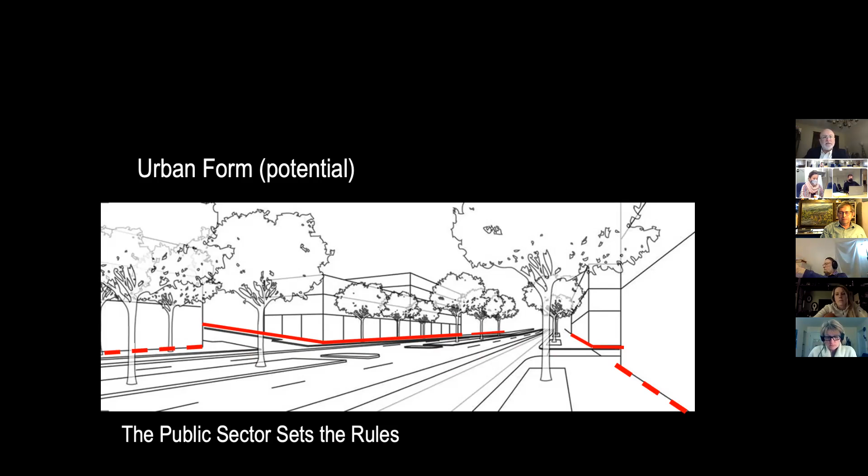We talked earlier about the idea that in a form-based code, the public sector sets up the rules, and the form-based part defines the street space. With the public realm standards, we're dealing with what happens between the buildings, making sure the sidewalk, tree lawns, travel lanes, and trees are done right. That's not a coding issue, that's a specifying issue, so that in partnership with the private sector, something great gets built. You can get developers to pay for those things, but they're really a very specific public design.

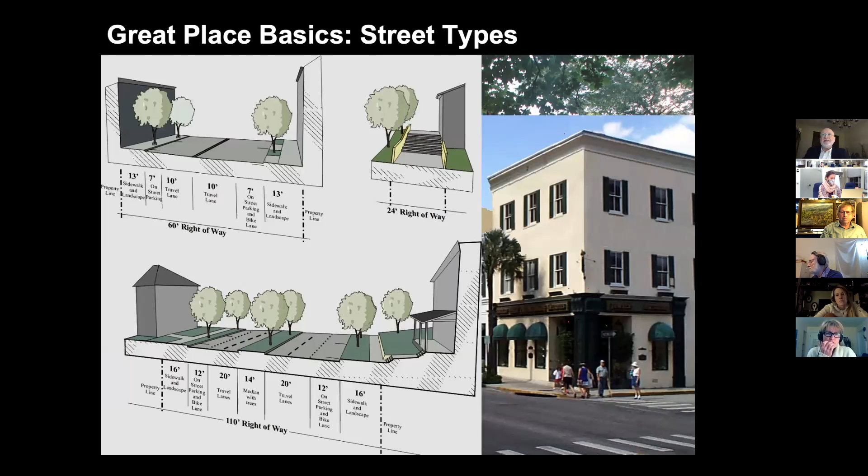Talking about streets, it's not just the place where the cars are, it's the whole thing. There are different types, it's not a one size fits all, it's a bunch of different pieces that fit together, a network. Some examples: in Berlin, Unter den Linden is a great boulevard, most like 2A. On the left, this is a mews street in Philadelphia.

We don't have anything like that here unless somebody private builds it within one of the blocks, which they're invited to do. We don't have a section for it, but we have rules for pedestrian passages, ensuring these will generally be things like this—from the sidewalk back through to a parking area or the back of the building. The rules make sure those are straight and visible, no hiding places. It's a short connection. I'll plant a seed in everybody's head a few more times about fall color and tree species.

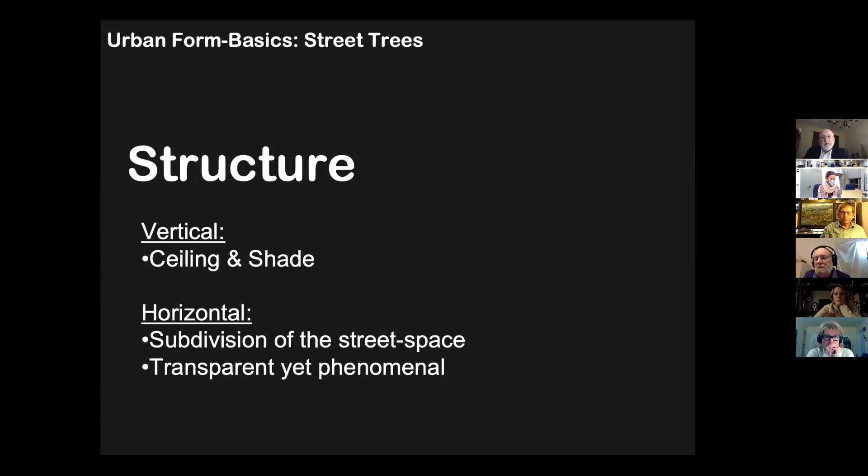When we talk about trees, everyone understands the biological value, their habitat, they're literally and figuratively green. But there's also a point about them as architectural, structural elements.

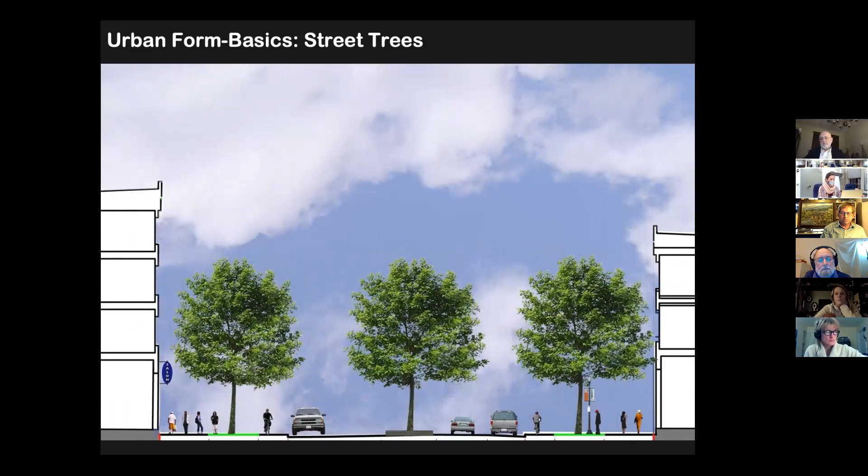This is a street, not one of ours, but a particular street 100 feet wide with a median—that's actually a pretty wide street. It's 4 lanes, and that median could be a left turn lane. With trees, you take that big space—one level has one reading of the big 100-foot wide space, but the trees start to subdivide it. When you look directly across the street, the trees don't block your view unless you're standing right in front of one, so you see the whole space. But as you look down the street, that 100-foot street is subdivided into smaller sections that really make it feel better.

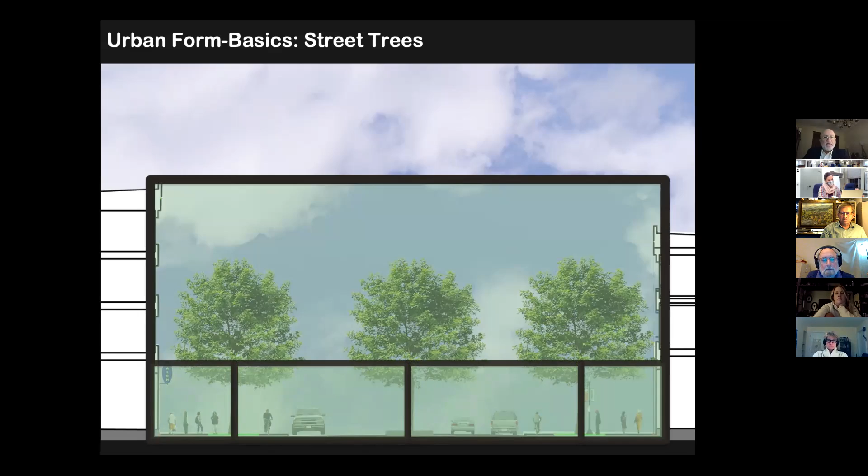Technique—I'm going to flip through things that we have avoided big time. The street sections we're going to show you are very good for the trees, which means the trees will grow and thrive, and this will be a very green place, especially in fall.

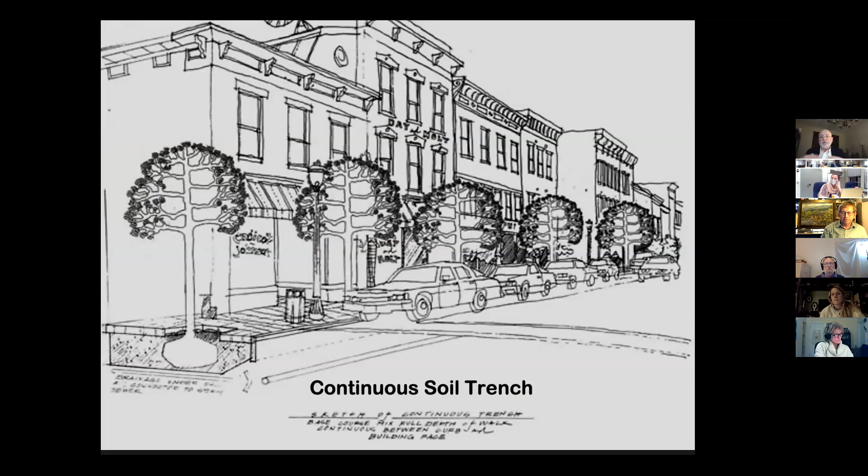The sections we're providing call for a continuous soil trench. There are a lot of different ways to do this, but basically the trees are going to see a lot of connected soil, which they can use more efficiently than a single tree alone—they can actually share soil in some ways we don't fully understand. This is an image that is actually in the code, suggestive of that.

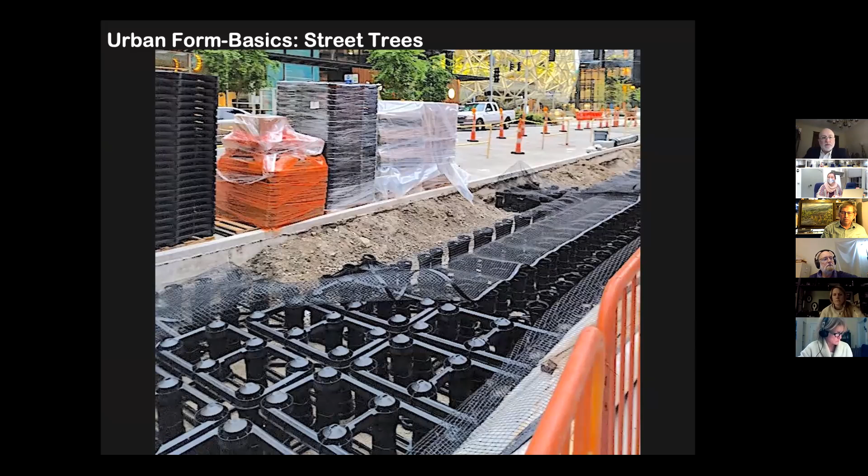So you're going to have great street trees, and that's hugely important. It means we'll all come back 5 years after they're planted and be impressed. And in 10 years we'll be wowed.

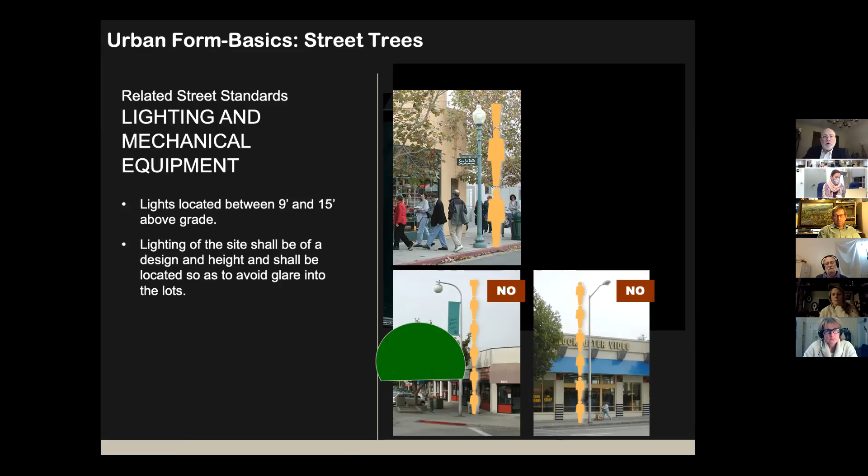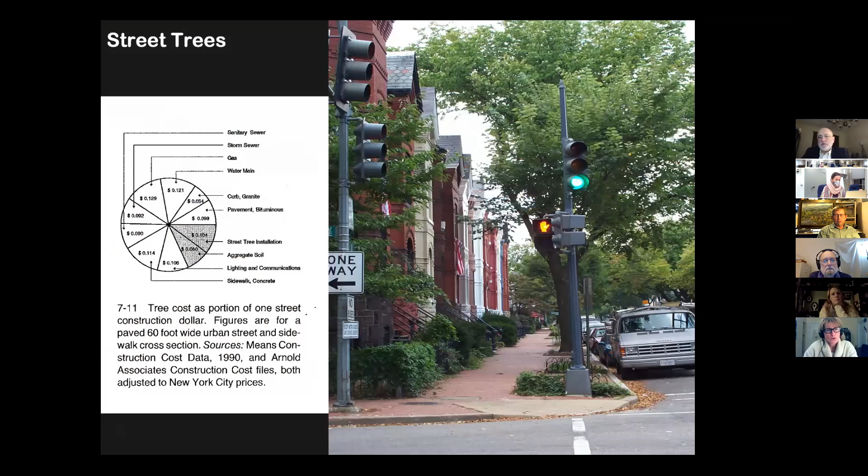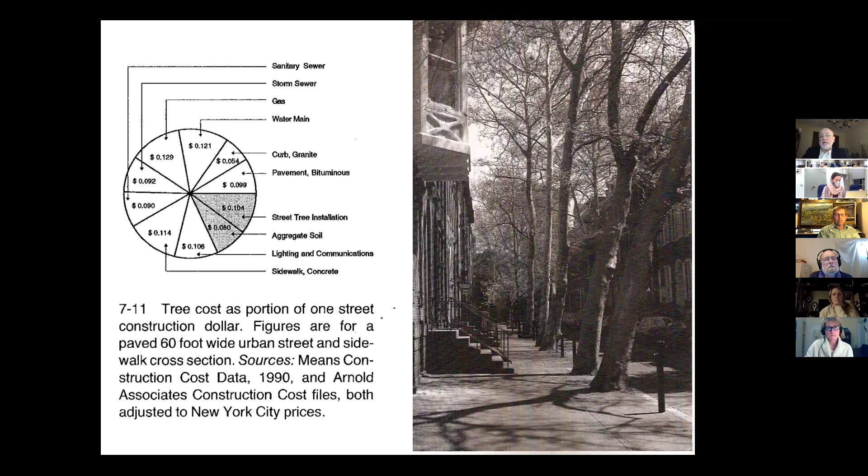A point about street trees and money - a percentage of the budget. Don't try and read the dollar figures, they're old. More look at the piece of the pie that the street tree infrastructure is in this installation. These were New York City projects by the architect Henry Arnold, who's no longer alive, but was one of the great landscape architects for urban trees. It's a small piece of the pie when you think about how trees that are properly planted start to grow and take over. Well worth the investment - it's something that just grows, increases in value over time.

Guess what kind of trees these are? These are American elms. Talking about the big bugaboo, Dutch elm disease - this is the before picture. This was a monoculture throughout, not just whatever city this was, I've forgotten, some Midwestern city. There was like a monoculture over states and states of cities. That's dumb, and this is the after picture. When you have a monoculture, you get some kind of invasive that just has a heck of a time and feasts on them.

I think the reaction of too many people - I think it's time for us to have our second generation thinking about this. The initial reaction is like when, at some point in everybody's life as a kid, they burned their hand on the stove. Well, that doesn't mean you never go in the kitchen again. I don't think anybody did that, but you're smarter about how you approach and use the stove.

We are now smarter about trees. We have resistant species, we understand the factors. I'm a big critic of regulations that say every other street tree needs to be of a different species. I will assert strongly that makes as much sense as never going near the stove again because you burned your finger once. We need to do this more smartly and manage it, and realize that it's not 1950 - we know more things than we did. Doesn't mean to be stupid, but a word about the incredible synergy that comes from planting the same or similar species.

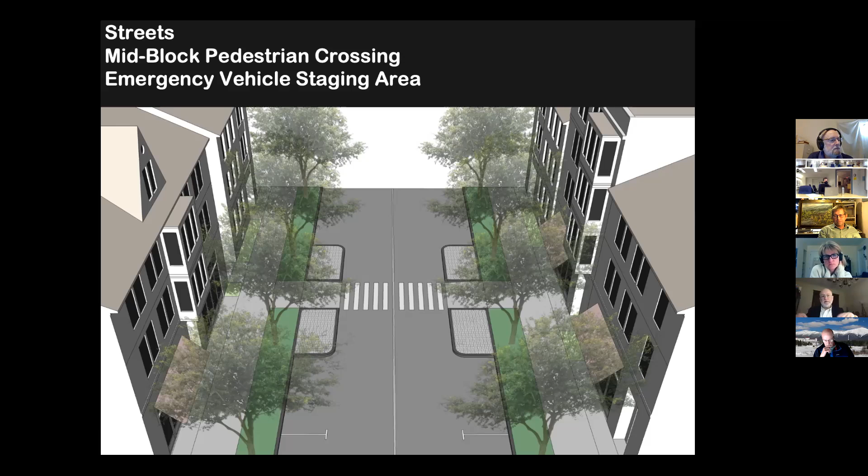Also, a car going down this street will see, even if nobody's parked, there's the curb stepping out to help really make the driver think and feel the speed.

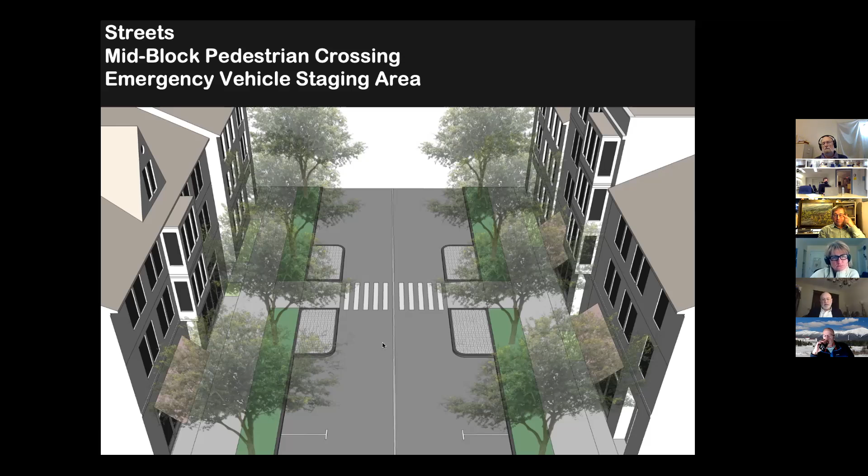If you're Aaron, if you're the fire chief, this is a place that's reserved where there aren't trees, where you can park your gigantic ladder truck, prop out your outriggers without fear of having to set them down on top of Chapin's Volkswagen or Maserati, whichever he has out that day, and then run the ladder truck in all directions. Also, fire hoses—there's a general rule that they can run them 150 feet from a hydrant, so this would be a convenient place for the town to plan infrastructure and place things like hydrants here. So this does double duty.

And then finally, the always underestimated but very important alley. Simply put, it's about 18 feet of pavement, plus 3 feet on either side, so it's a 24-foot right of way. The building form standards all have some kind of a setback from that line. So this is something that should be in the back of, or going through, almost all the blocks.

There may be an exception where something's a bit different, but this is a basic alley form. It'll take all the loading and parking, off-street parking off of this. And here's what you don't have, and I apologize for that, the streets map.

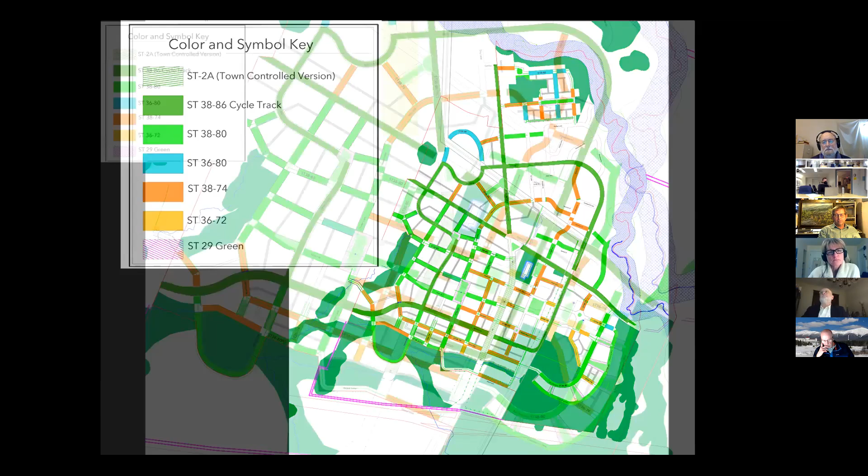Also some of Finney Crossing, the part that's built, so we're not really changing anything up there, but this is Zephyr. These darker green streets have the cycle track. It's not the only place there are bicycle tracks. If you look in the vision statement, there are also proposals for bicycle trails that would go along this edge and out through the landscape park here, also connecting up north. Those would plug into this. You see the framework, and in a perfect world this would be a more direct route, but it's not, so we have that funny loop, but it would all be connected. Where the green doesn't go all the way through, that's just acknowledging there's some engineering to be done where those intersections happen. But in general, that's the cycle track, the 86-foot section.

Now what happens on 2A, the cycle track configuration is the same, but that's a special section. The Williston Road up top, until you get out here where the right-of-way gets really wide, and I think that's a problem you might want to address down the road because it's just, I'd say, wasted width. But there's cycle tracks on that. Then the lime green, that's a step down, the 80-foot section.

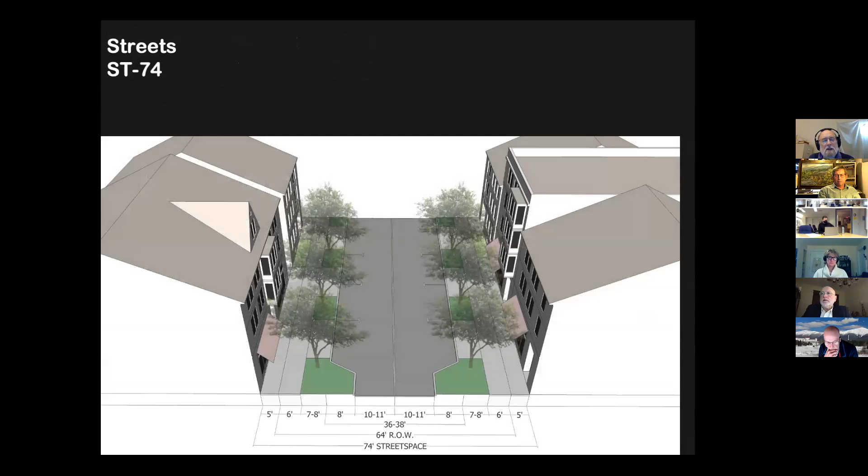What I was worried about is, as you pointed out, when people are parallel parking they swing their front end out. And if people don't park perfectly, 8 feet is pretty narrow to get your vehicle into. Well, although I would point out—oh sorry, that might have been it there. Well, they're all—let me go, I'll go to the green. Yeah, I went right by it. I parallel park, I don't drive every day, but there. I can't control myself. I don't drive every day, but when I do drive, I parallel park a couple of times.

No cars on the road are wider than 8 feet. To be wider than 8 feet, you have to get an oversized load permit. There's nothing you can do about somebody who just parks in the middle of the street except give them a big fat ticket.

In real life, when somebody's got an 8 foot wide vehicle, a pickup truck, and they don't get it all the way over when they try to parallel park because they don't have enough space, how does this actually play out, and is 13 feet comfortable? Even with a 10-foot lane and an 8 foot wide car, you'd definitely slow down to go around them because you're being careful. But in a 13-foot lane, you've got that room.

If somebody slows down to go around them, that could be an issue on 2A, but on these streets, not so much. Someone might think differently, but no one's going to get run over by a car that's slowing down. The 13 feet is wide enough for the fire vehicles to get through.

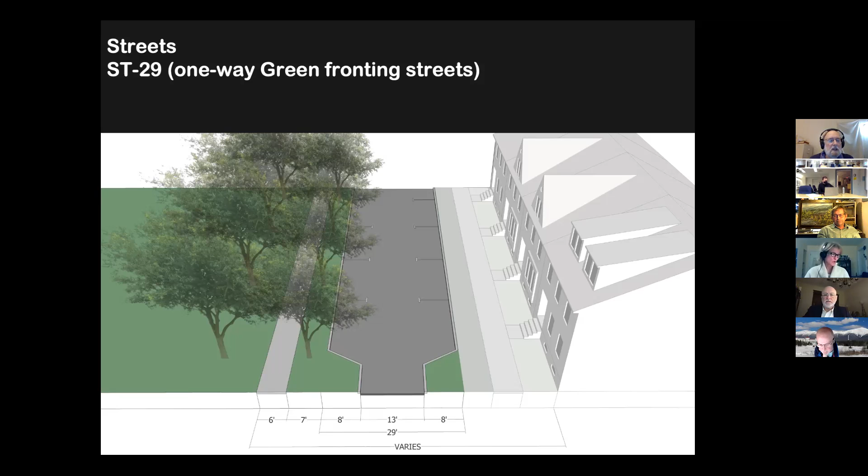I'm not that used to speaking with Rick on this, so I'm saying things I should be quiet about and let him do the talking. He says it in a lot fewer words.

Jeff, speaking of which, do we have an ST 3672? I don't think we do. We kept the rights of way the same. The street, that's why I noticed it. By having standard rights of way, you can make changes later if you need to, after the plan has been prepared. So we actually just have 74 and 80s, I think, and then except for 2A, right?

Yes. And then some figuring out what to do with the, I would say, egregiously wide piece of Williston Road that is on past Zephyr Road. And I apologize, this is my mistake, just a mistake, it should be 74. We have two 74s, two 80s, the 86. Right, it's right in the plan, it's just not right in the key.

There's some thought to what streets might carry more traffic, what would be busy. Some of the concentration of 74 in this area is thinking it's more likely to have retail because of the current retail here. And then mixed into that, it's kind of a goulash stew with ingredients. There's some value in a little bit of variation too.

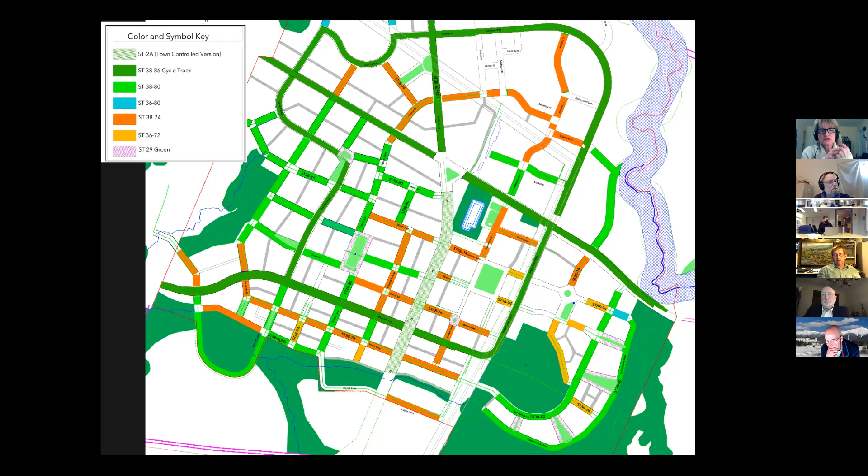So in the cases where you showed a diagram where there was a cycle track that was separated from the road and also separated from the sidewalk, like on 86, it has the green, these framework streets—street, travel lane, parking, then cycle track. So my question is, are all of the darker green places where the cycle track is buffered by on-street parking? Except, other than never say always or never—so there might be an exception, but the rule is yes.

Okay, so those are parking spaces right off the travel lane. So I guess maybe something we can pay attention to, and maybe Rick has some additional comments on this, but I think having as much consistency as possible for the cycle track streets where there is on-street parking would be a benefit, for that element of predictability where you know what to expect.

Yes. And I was just curious if that was the case—not 2A, because there's no on-street parking—but all the other areas that are cycle tracks, are they always buffered by on-street parking? It's designed by design. Yes.

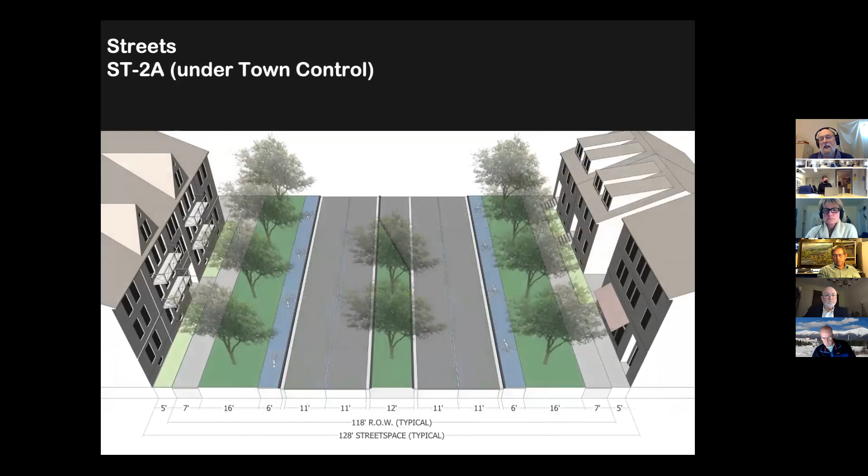I'll just comment that this is a lot to absorb all at once because it's updates and new information. And I think we're still lacking a drawing that shows what we were just talking about with a cycle track that's separated from parking.

That should be on page 75, right above 2A. Well, it's next to the parking. And I thought we were talking about it being separated from the parking, from the on-street parking. No. Oh, so I misunderstood Megan's question and your answer. So in areas where there's on-street parking, the cycle track would still be next to the cars?

Yes. That's a good thing. Because, okay, except for doors opening. But we don't have a 3-foot cycle track, we have a 6-foot cycle track. Yeah, that's plenty, and it's one way each way. Okay, I think that's fine.

As a frequent cyclist myself, I think that's a really good configuration. I'm really happy that that was your answer to my question. And a small point, this is ridiculously esoteric, but the first time I started dealing with that section, Rick was in on this as well, but Steve Price, who does the photo imaging that's so excellent, he is a bicycle advocate almost to the extreme. This was something he was pushing for in a project we did 15 years ago and showed us images of it, and we grabbed it.

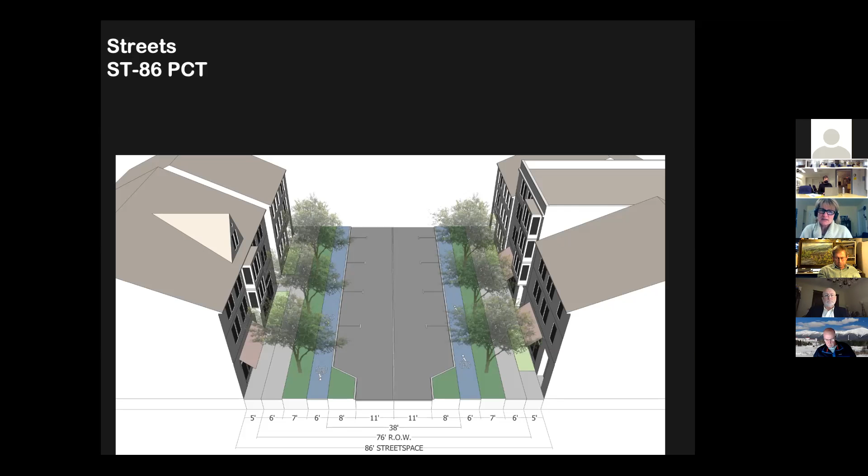I guess I'm a little confused on what our process is here tonight. I know we jumped ahead to the public realm because Rick was with us. But I had a lot of comments on the public realm section, and I wasn't clear on whether you were looking for that feedback tonight, or was what you presented, Jeff, kind of like a quick overview and now we're going to go through it in more detail? Because I'm a little confused. We can certainly go through it. And there are a lot of changes which I missed, I read the old one and can read on the spot, but a lot of my questions or comments are still relevant. I was just kind of curious about our priorities given our time.

I would say we can absolutely go straight to talking about this, I feel like we've covered the street sections enough. There may be questions, details and comments about it, but I think the discussion about the different sections was starting to lighten up a little bit. And I do feel very strongly, these are real street sections, courtesy in large part to Mr. Chellman. So we can certainly answer more questions about them, and why not move on to things like street furniture and noxious weeds.

In which case you don't need me, right? You don't like noxious weeds? No, I guess we don't.

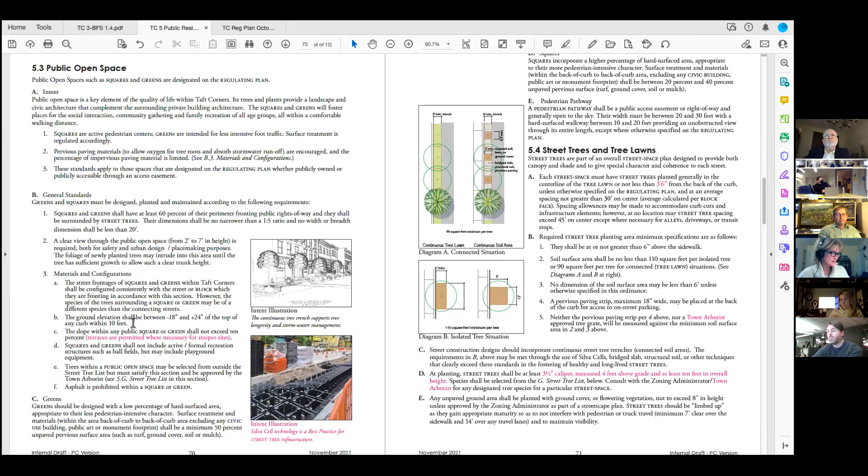Fair enough, but there are some efforts to have more natural landscapes that use different species and are planned that way, so it's not weeds, but unmowed sections. I'd like to acknowledge that's possible, that maybe the exception after the 12-inch height could say something like 'except planned and maintained natural landscaping' or along those lines.

I'm not against that. I'm concerned though, because it does happen, and it's not going to happen early in a first building's planting, but there's always a concern about somebody who plants bamboo in their front yard. Actually, my mother was fined about 16 times by the city of Denver over buffalo grass. So we'll expand on that, I think. Okay.

I think, like the others, I had a couple other small comments, but they're preempted by your new pink materials, so why don't we just move to that. Okay.

What happened with this pink is an earlier suggestion, let's have some consistency. I think that's really important with the street lights especially, and secondarily with the benches and bins. So that sort of pricked the balloon and let all this out.

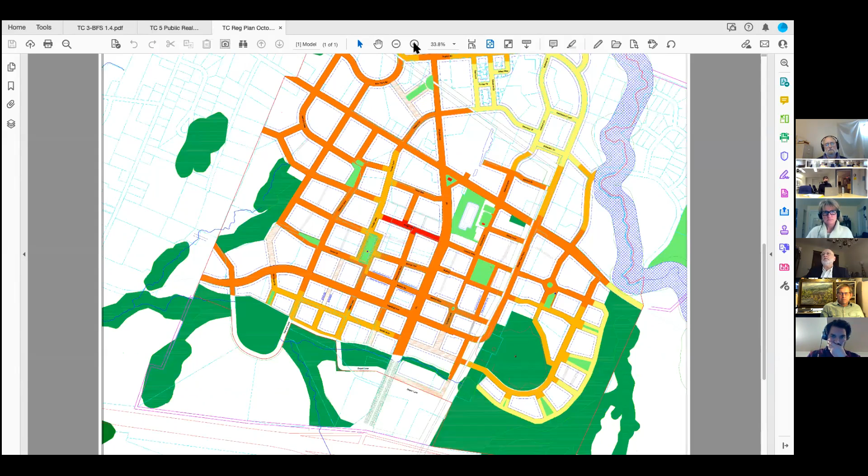Looking at the regulating plan, I think I'm freezing up a little. Look at how much natural area there is, and over here I don't show the green, but this is all natural - in really close adjacency we have real natural area. But there are a few places with simple lawn, because that's where you can play catch, you don't need to join a team or anything. You can sit and eat lunch. They're incredibly flexible spaces, just to be used to do whatever.

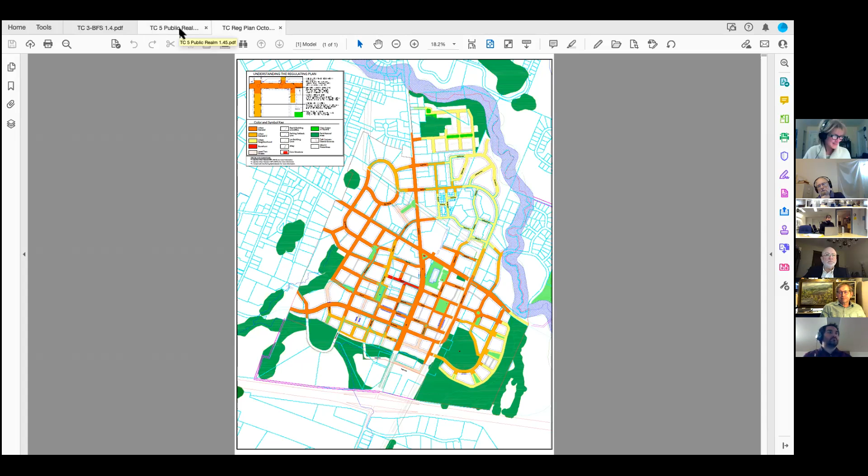Megan: I have a lot of comments tonight. In the general standards under public open space, number 1, it says squares and greens shall be surrounded by street trees. Can we have a caveat about that, to not put trees around spots where there might be a really great mountain view? Because I think that's one of our nicest opportunities in Taft Corners, to take advantage of those long views of either the Green Mountains or the Adirondacks, depending on where you're standing. But if we fill it all in with trees, we won't be able to see them anymore.

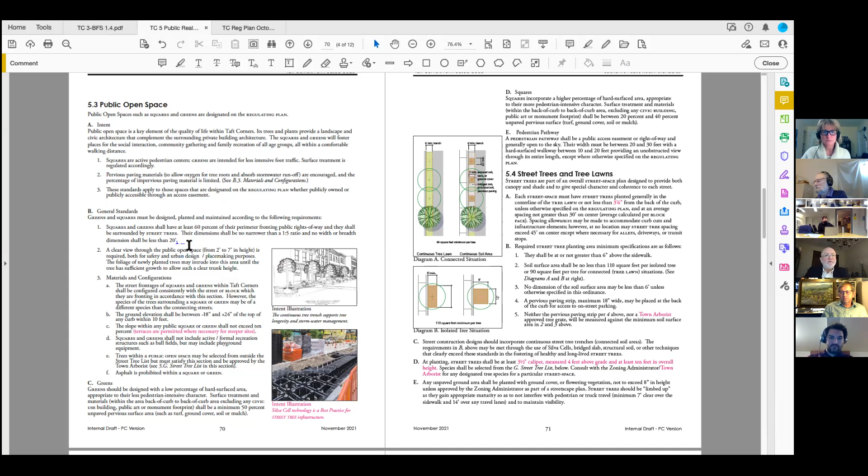Yeah, I wrote it down. I don't think it's a problem because you can vary the spacing and set up special views. But I don't know if it's on everyone's radar screen - like the contractor comes in and is supposed to plant trees around the edge at a certain spacing, and that might not even get any attention. I think when we talk about the regulating plan, there's some places, like right by the big pond where you've noted some topo differences, where we could actually mark the spot and designate it as a viewpoint. Okay, great, thank you, that's helpful.

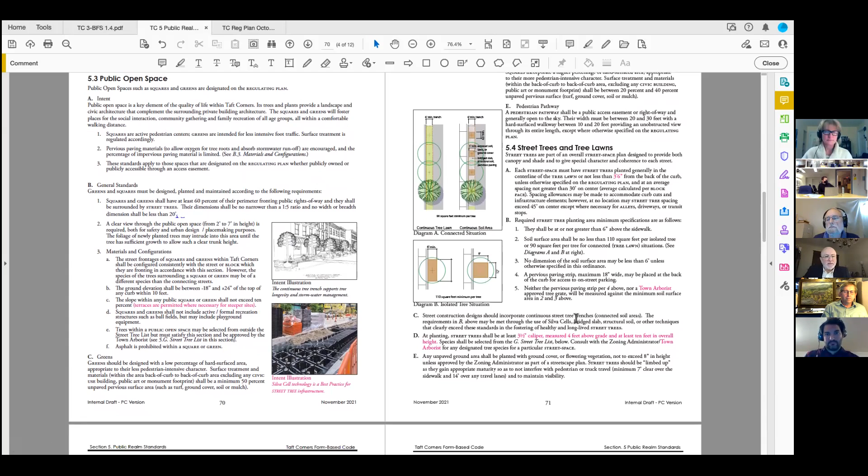The term town arborist is something you probably saw - right now you don't have one. That might be someone designated, and in 10 years you might have one.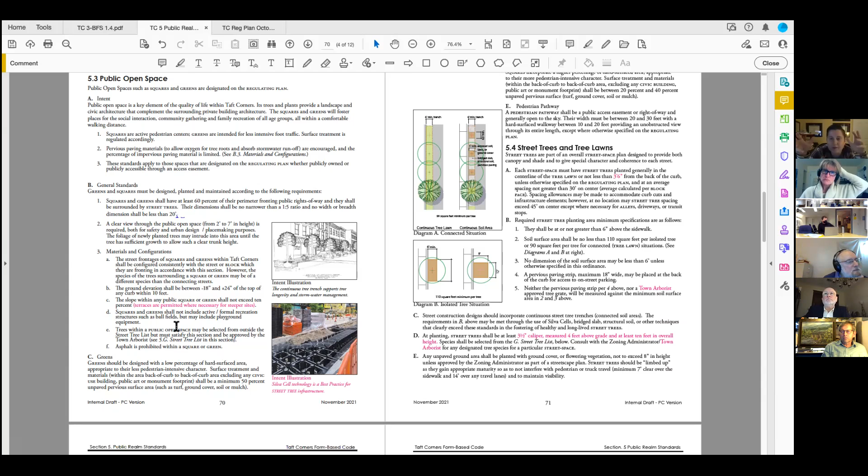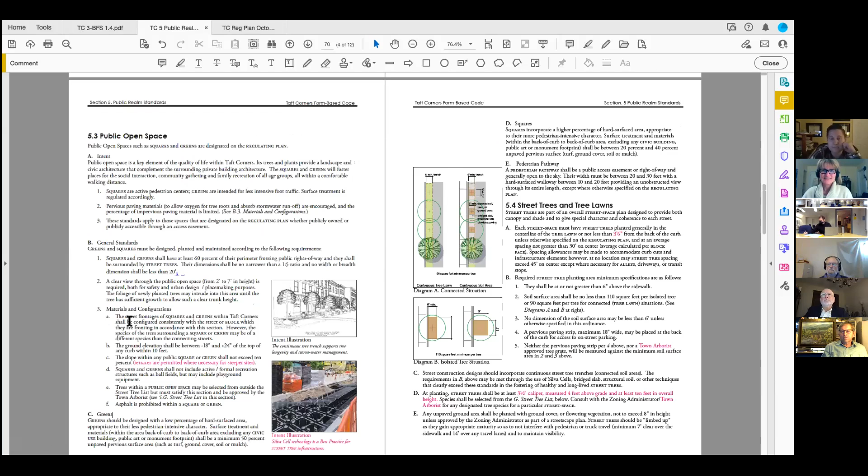Jill, would this be the spot in public open space, maybe in your general standards, where we would talk about some freestanding restrooms? Burlington Square has one near the little water park. I just think not having people purchase stuff to use a restroom, especially with COVID, being able to do it without going into buildings when you have kids and you're just using green spaces and need to go potty real quick - I've loved that Burlington added that. I think we could have multiple, given the size of our space.

Yes, and I should have already inserted something like that. It's a very civilized thing that they have in a lot of places - I don't think it's only in Europe, but I think of it as European. I recognize Burlington just added one, and that's huge. Jeff, the one in Burlington is one of those Portland loos, it's in City Hall Park. I'll send you the spec for that.

Okay, I'm wondering about benches, waste and recycling bins, bicycle racks. There's a number 7 or 8 here, something.

Yeah, and I'm sure it's happened to all of us. You get caught out.

Kate: Well, I'm just wondering, who's going to clean that? Because that's something that would need to be highly sanitized often. That's a good point.

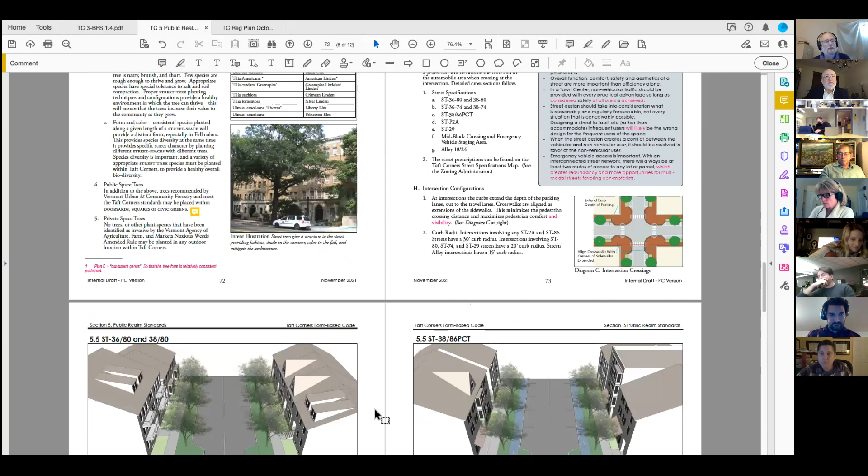Jeff, if I could give an inappropriate comment, I don't like the roofs in all your pictures of the different street cross sections, and I don't like the dormers. But I don't think that's the purpose of the drawings, you were trying to show you could have pitched roofs with dormers. Also, there aren't enough balconies, and some of the designs for non-storefront streets have an awning showing at the bottom as though it's for storefront. So those are trivial objections, just my personal preferences.

Well, that could be, okay. We'll work on that. What's your problem with the roofs? I'm curious, a tweak might be an easy thing. You want to see a flat spot with solar cells? I would like to see solar on some of the roofs, yes.

And if someone were to do what's shown here, they'd have to do a lot of work to prevent ice from falling on the sidewalk. So I'd like to show something a little more practical. We'd have a steep pitch, I thought that's less than the minimum pitch we've specified.

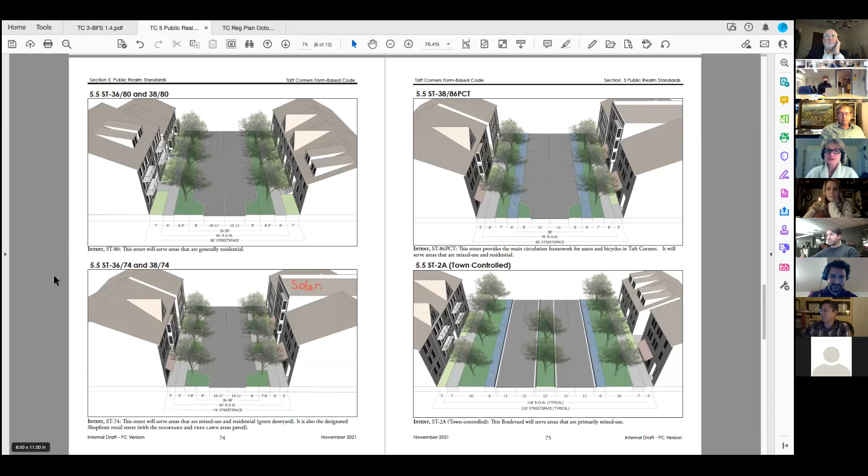So just to kind of regroup, what is your preference? Matt, I'm not sure, did you want us to try to talk about the building form standards, or was that something you were going to respond to? We've got about 10 minutes that we could address some pressing issues. Let me see if I can just summarize what I saw.

I saw survey responses from Jill, Megan, and Chapin, and I've copy-pasted those directly to Jeff, so he has your words. Matt, I also submitted survey results, but I did it a bit late, so if you wouldn't mind also forwarding those on. Absolutely, will do.

So, where we left off with building form, we had a lot of discussion on the general standards that apply everywhere in one way or another, but we hadn't had a lot of discussion on the standards for the specific frontage categories, the four categories mapped into the regulating plan. Absent one comment in support of one height standard, I didn't see a lot of feedback on height. There are some selections that could be made there, but we had a more general conversation with the group that was here last week, general interest in height as an element of design that allows for integrating affordability and achieving some of the other goals of the town plan. So I'm not demanding everybody give me fine-grained input on building height, I'm just saying I'm not seeing a lot of response in the survey related to heights as they play out in those form standards, because that's one of the ways those form areas differ from one another. You go from bigger to smaller, essentially.

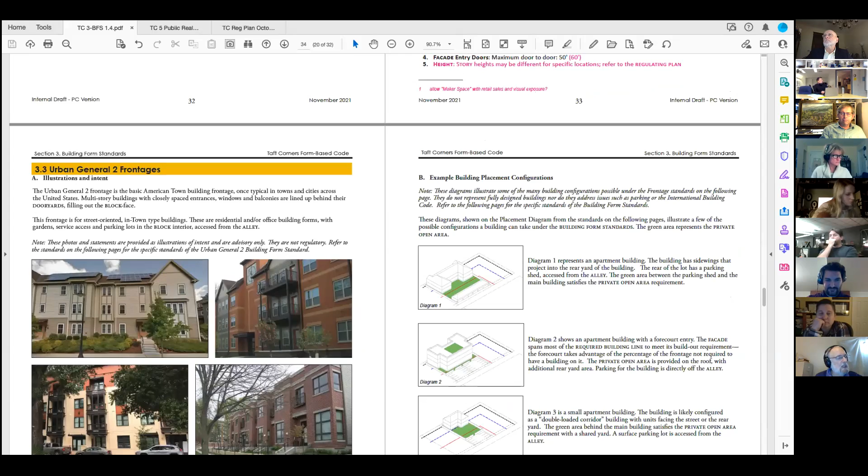A couple comments we got on names of the areas. Jill, I think you called out that we talked about using a less loaded term than neighborhood manners when discussing how new development integrates against the existing neighborhood. We talked about changing that to neighborhood relationships, and I think you saw some of those changes, but not all.

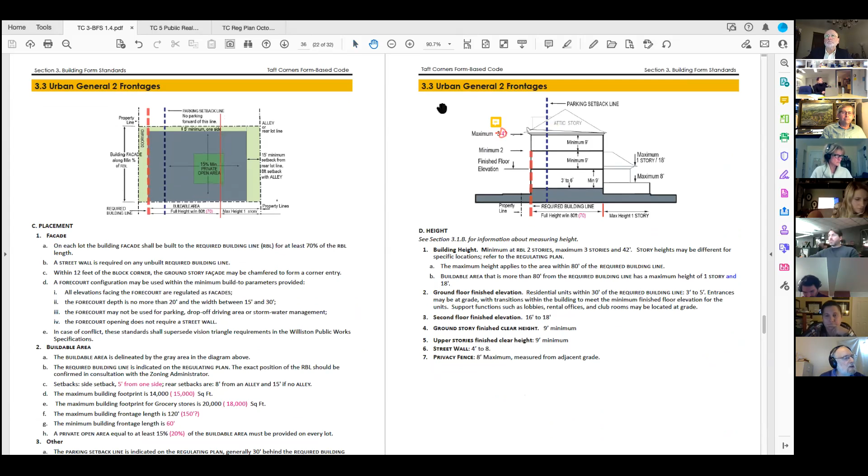I was also wondering about the idea you asked for feedback on in the survey regarding naming. I wasn't being clever when I was going through that, but I think maybe that's an opportunity for public input. I know other towns and cities have crowdsourced that kind of stuff. Granted, there's some goofiness that can happen, but it's a good way to get public input for renaming those zones so they could be Williston specific or Williston unique. The public might come up with good options.

We can just jump right to 'Urban McUrbyface' if you want and skip the public input. Yeah, sorry, that's a terrible joke, but it's a possibility of course.

But in terms of where we're trying to go with it, I'd love to bring it out to the school kids, just like we did with the snow plows. I mean, I think that's good, and it's the same thing as we've talked about regarding the uniquely Williston stuff.

Chapin had some comments about really pumping up the support for solar in regards to the way we talk about form. And I think it's a discussion we might have a little more offline about how we make sure there's good ADA access to buildings, because we have questions about floors and lobbies and entering at street level. If I'm reading all that right, we certainly don't want to tell somebody who's using wheels, whether it's a wheelchair, stroller, or anything else, that they always have to use the rear entrance. But there's a bunch of ways to go after that without being too heavy-handed on design.

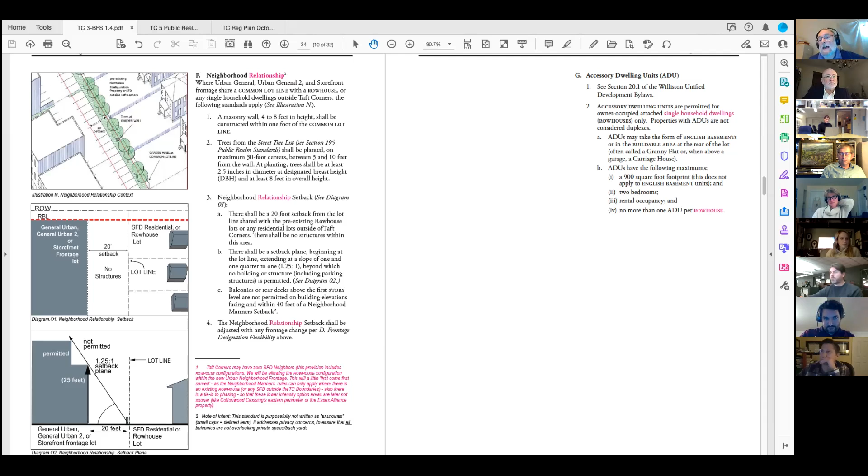On that point, I would just ask if staff could check with South Burlington on what they're going through with those apartment buildings in the new stuff off Kennedy Drive, and see why that's been an issue. That would totally answer my question.

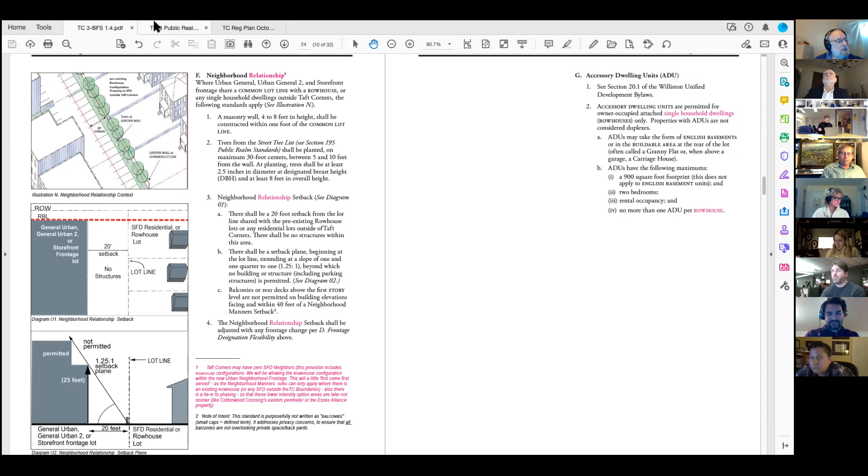There's something I didn't put in my comments that I wanted to ask about, on the revised one. It's on page 9, which is actually numbered page 23. I think this occurs in several places, where it says balconies, where balconies are required or being used as a method for achieving the required private open area. It didn't make sense to me that balconies can qualify as private open area, because I thought the idea of private open area was that it was for the building, not for individual units. Did I miss something there?

The big tenet is private open area is supposed to be private. For single family, it can be private to the family. For common buildings, it has to start to be some kind of community or building-wide thing. But balconies are the one exception where you can actually have an apartment that has its own private open space. So that's a luxury, but it's definitely still private open space. It's actually, in a way, more private.

So what I am worried about, going back to a comment I brought up last time, is if you have quite a few units in an apartment building and most of those people have dogs trying to walk them in the private area. If some of that calculation of the private area is for balconies, I really worry that we haven't specified enough space. I would say we absolutely have, because typically in zoning they'll have a maximum lot coverage, and anything not built on counts as open area. So 20% open area, a lot of that can be garbage space, little slots between buildings. This 20%, or whatever number we land on, is only part of the buildable area, and any side or rear setbacks are in addition, so it's typically a bigger number than that.

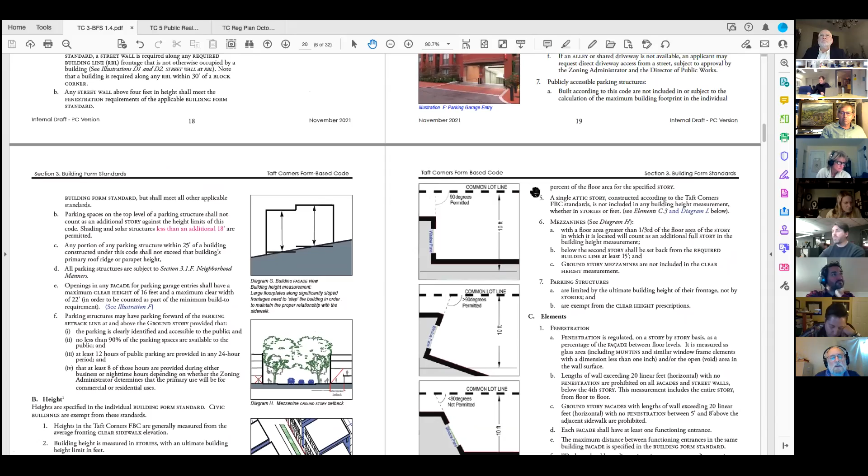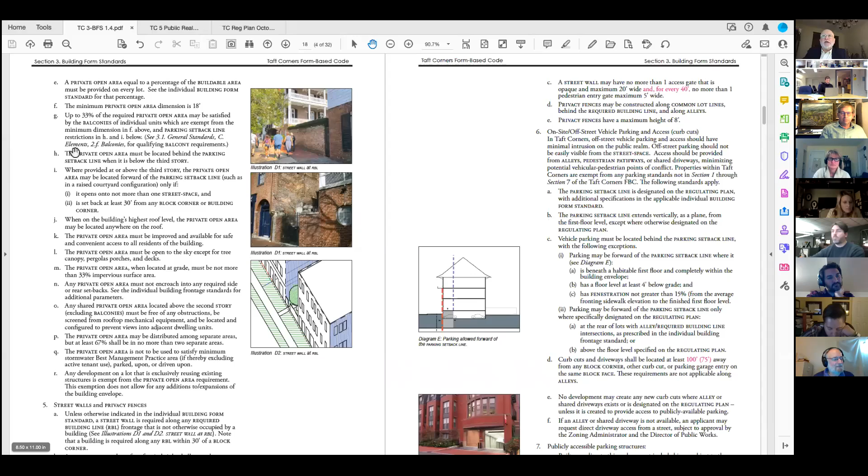You sort of convinced me of that, but if somebody had a lot of balconies, could that add up to their entire space? No, there's a limit on it. What did we say? I'm thinking 30%, but I'm not reading that right now. Let me look it up... Oh, page 18, up to 33%, so a third.

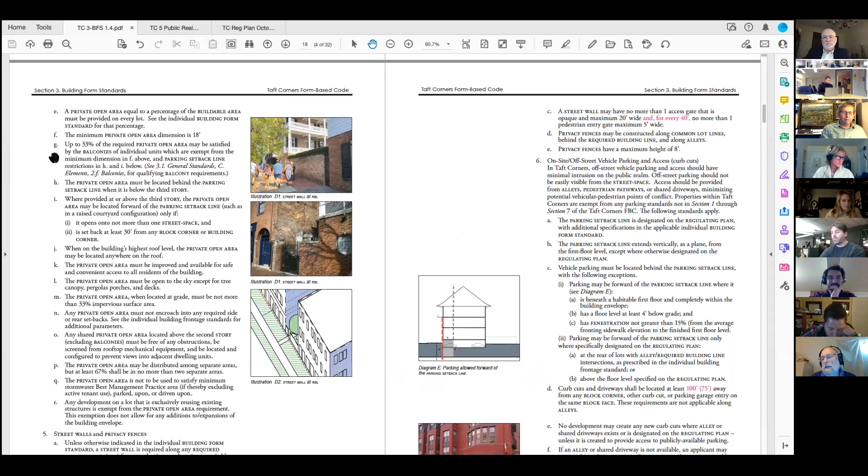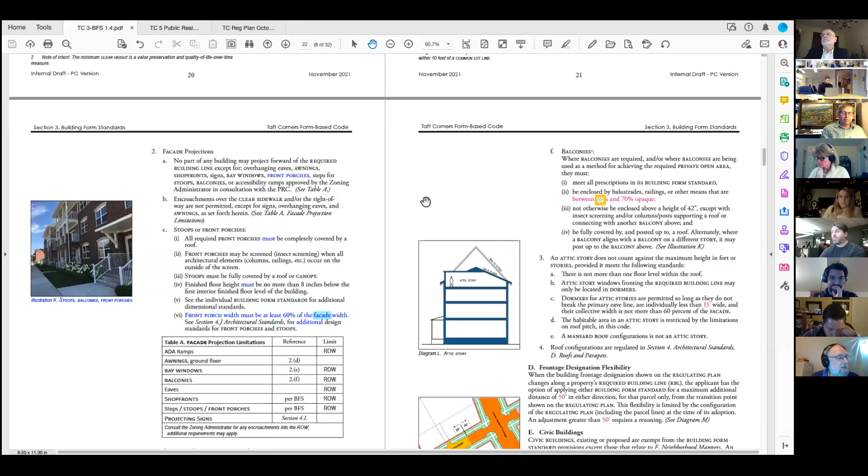I wanted to reiterate one comment about balustrades or railings on balconies. You were worried about what people had stored on their balcony and how visible that was from the street. I'm worried about a different aesthetic, and thinking I'd really like to be able to have wrought iron balconies as decorative railings. I think you have it there as 25 to 70%, which was a change from 50%. I saw that comment and want to change it to 20%. I'd say if it's a decorative wrought iron balcony and not just a minimal building-code balcony, you can achieve 20% because it's going to be more than just 4-inch bars. I just wanted to make sure we weren't excluding that, because I'd choose other ways to control what people store on their porches that's visible from the street than to say you couldn't look into it.

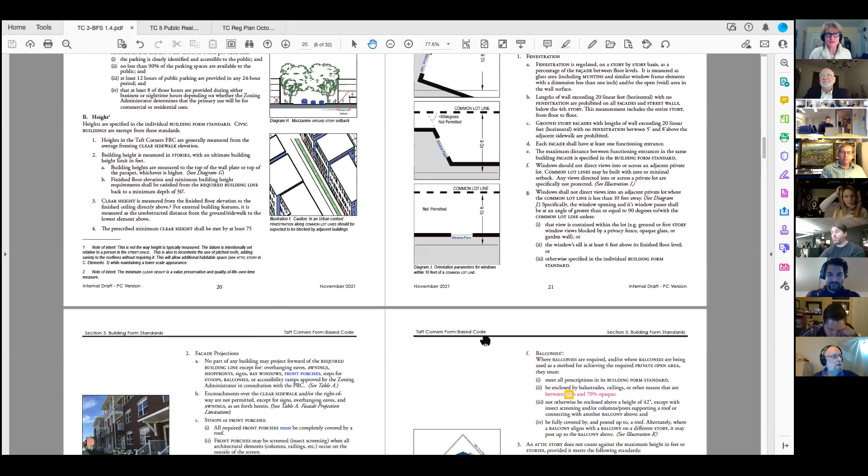Just a really quick comment — let me get the right section. In C elements, the section is C2C, stoops or front porches, on my page 22, which is the old page I think. So it says stoops must be fully covered by a roof or canopy, and I don't think that's right. I would suggest it is, even though you see a lot of stoops that aren't. It's better for the climate where you have weather, keeps stuff off the door, gives you a place to stand out of the weather. And talking about flat facades and having some shade, shadow, and relief, that roof projection adds that. But that suggests the entire stairway out front needs covering.

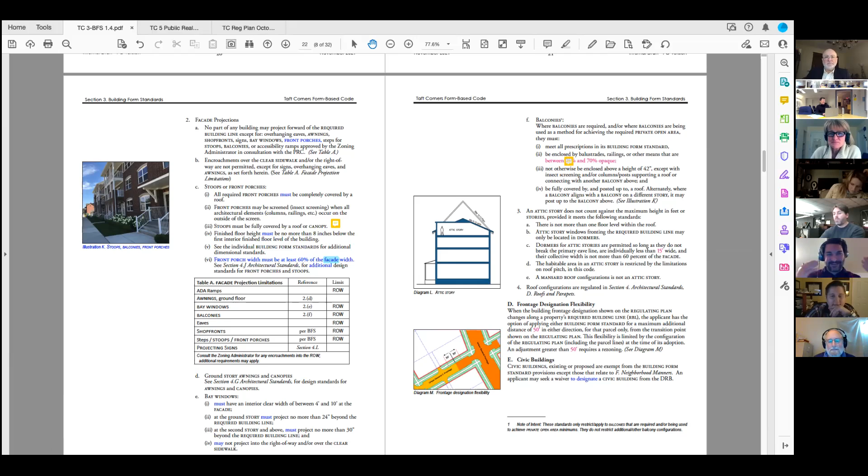Not the stairs, the stoop. Okay, can we just define that? Because if you Google image 'stoop,' you get stairs, right? Not just a little recessed door frame — you get stairs. And I think people, in whatever, Brooklyn stoop culture, that's sitting on the stairs, not the immediate door frame. I get your point, but I think there's a little bit of a lack of clarity there. I'll put that in the yes or 'right' category. Thank you, I don't need to keep track, but just a quick call out there. Taylor's rolling his eyes.

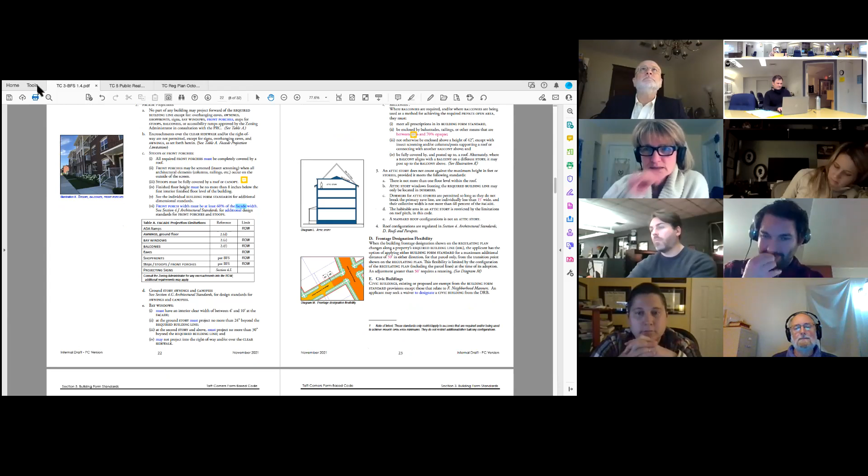My bad. All right, so minding the time, are we pretty much wrapped up with this? Are there other final comments that anybody wants to make on the building form standards?

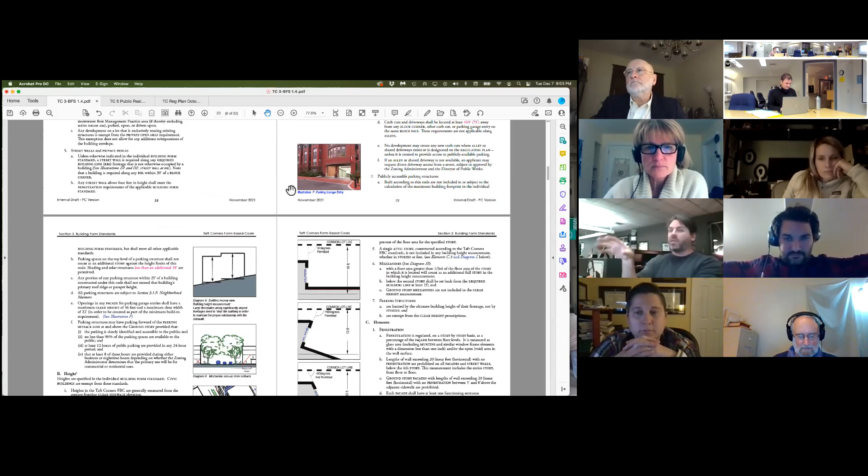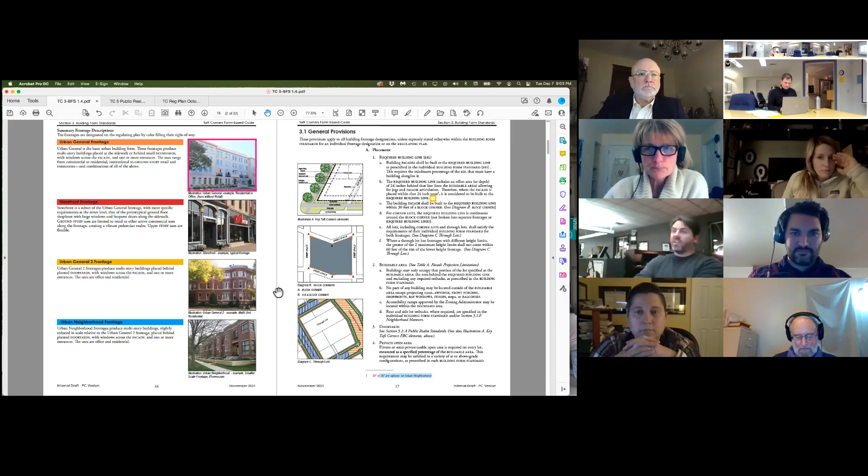Megan, can I just ask more generally — I really liked the survey. It gave me a chance to sit down and really think over these things. I sent a lot of feedback in writing that I didn't feel was necessary to go over as much here, because I think it'll make it to Jeff. Can we do the same with the section we just reviewed on the public areas too? I'll be honest, I didn't get a chance, trying to catch up to you guys, to go into that as much as I wanted. I think it'd be really useful to send out a similar survey. Yeah, I should keep my mouth shut because I'm not the one doing the work.

I think you could cut your work in half for the survey, because I wasn't the only one confused by being asked the same questions twice. It was like, what comments do you have on these pages? And then the next section asks what comments do you have on this section. It was a little confusing and more work than needs to be.

I also found it helpful to have that time on my own to go through it a bit. I appreciated all the changes made from last time, even though I listed some things again, it was nice to see the responsiveness. I agree with that. Capable of learning, that's great.

Other final comments? Matt, anything to send us off with? No, I hear you on the survey. We'll put something simple together geared toward you guys walking through the public realm and providing additional feedback, and we'll consolidate that back. We're scheduled to move on to other sections in the next couple of meetings, so we'll see everybody in two weeks.

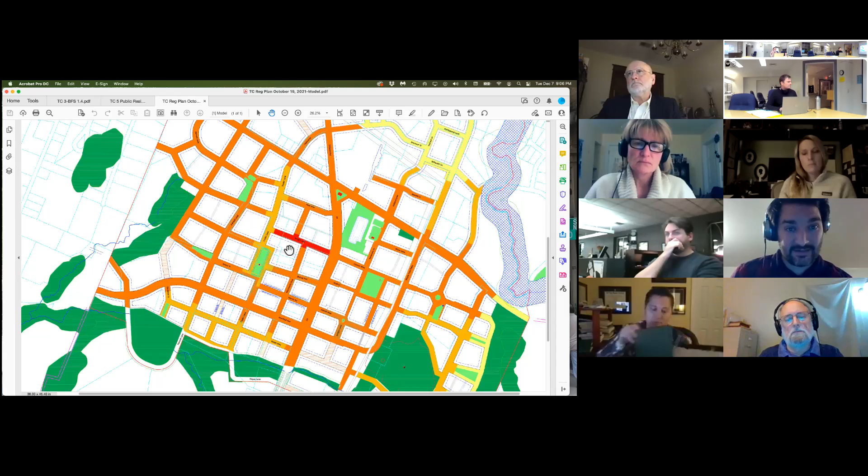I think we also wanted to take a look at that administrative section too, if possible, on the 21st. Yeah, we can do that fairly short. I don't think the PC has that section yet, that's section 8. We're drafting that now, we're going to discuss it Thursday and hope to get it finalized and out to you, fingers crossed, maybe Friday, maybe next Monday.

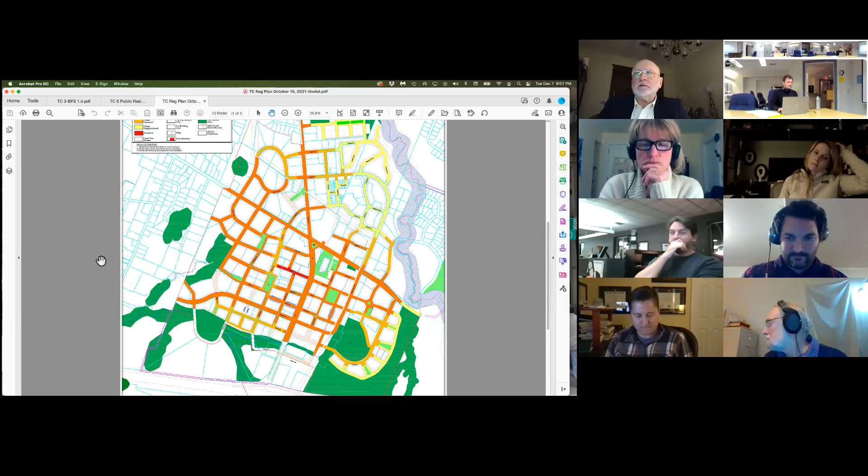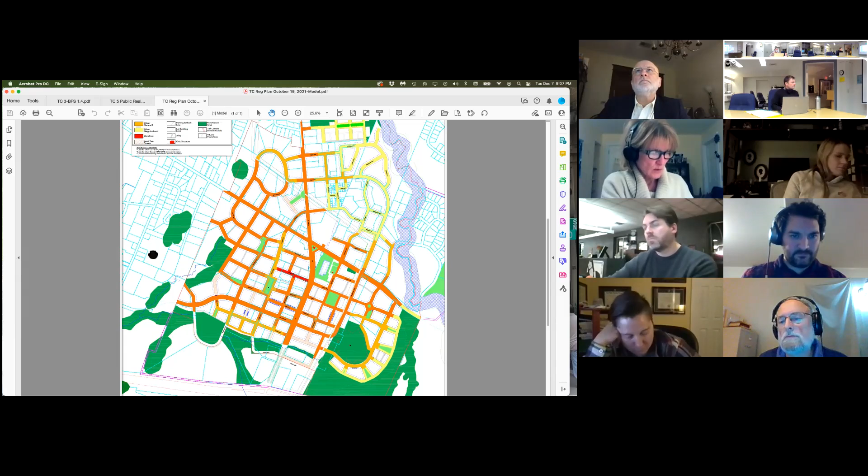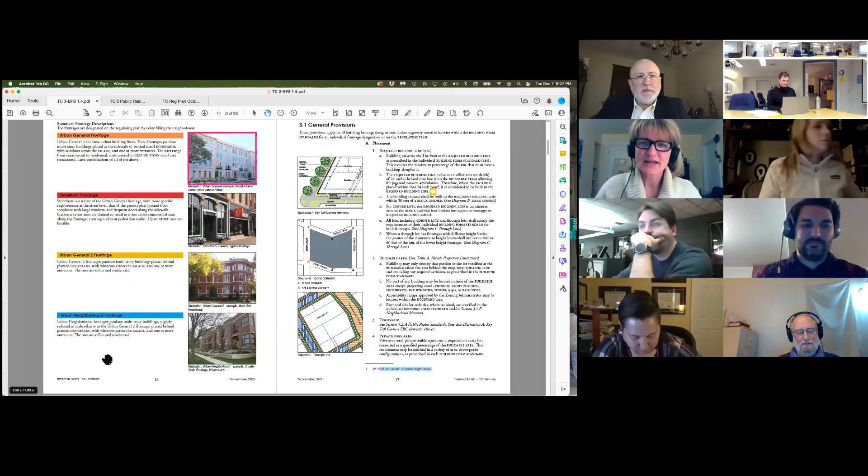Those colors should all match up. Right, I couldn't find blue on my map, which I have. This is definitely, sorry, this is my real Homer Simpson moment, that should be yellow, that's just one of those things. But then you showed us tonight a new one that does have streets colored blue and stuff, which is very, I'm looking forward to that new map.

Yeah, that one, I think we could send that out to you. We'll probably print out large 11x17s of those so you can add them to your folder. I took a picture of it. It's a little bit sloppier, it's an indication, I think it's going to evolve, but it will tell you where things go.

And also, it's a little more plastic, so I'm thinking it's not really part of the code, it's part of the town's implementation, it's part of the plan, if that makes any sense. Yes, it ties in with our official map.